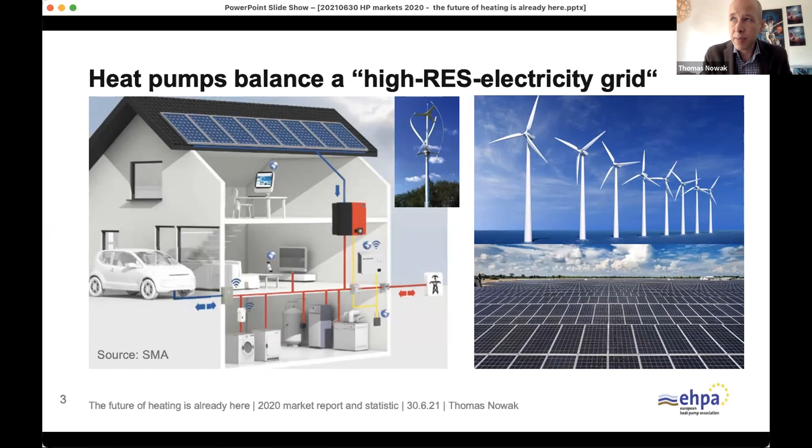On top of things, this slide shows that heat pumps also provide a balancing function to the electric grid, and that is something I find super important. If you've read the news, you've seen that last year Europe generated as much electricity from renewable sources as never before. So we're moving very fast into a direction where many small generators, and increasingly larger generators too, are providing volatile, not stable, electricity from green sources, and that needs to be balanced. Putting heat pumps into this concept, putting them into buildings, using these buildings as active nodes in an integrated energy grid that combines electricity, heat, and also cooling, is something very sensible because we want stable and sustainable energy supply.

Then there are also additional benefits from the technology. If you live in a city with a lot of air pollution, heat pumps will reduce that. I had this discussion this morning - I read that Canada is about to ban fossil cars by 2035, if I remember correctly. And if you consider that a diesel car is basically a fossil boiler, a mazout boiler on wheels, then maybe the heating system is the next topic that governments will address when it comes to air quality.

But also indoor air quality is getting increasing importance, especially as we see the effects of global warming. We're seeing that quite often it's getting very warm outside and you want to protect yourself inside with a better climate. So if you have a ventilation system, maybe an air conditioning system, and you put all this into perspective together, you say: I need heating, I need cooling, I need hot water, how can I do this in the most energy efficient way?

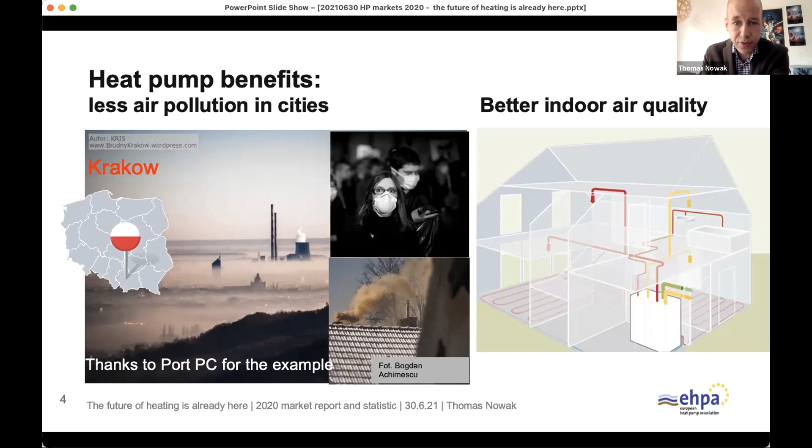Then a heat pump that provides heating and cooling at the same time is a good choice. And if you need cooling, always consider what you do with the waste heat. A cooling device where the waste heat is discharged into the environment will probably not be a good idea in the future, because we are producing thermal pollution from that perspective. And if the dual need for both energy sources is necessary, then we should have an integrated solution for that.

One word on the association: the EHPA is a sector organization. We represent more than just industry. We also have members from consultancies, research and development associations, companies and universities. We have utilities and national associations. So we're very broad when it comes to representing the heat pump industry as a whole, and we can answer quite a few questions you may have when it comes to a specific question applicable to a member state or to a certain technology.

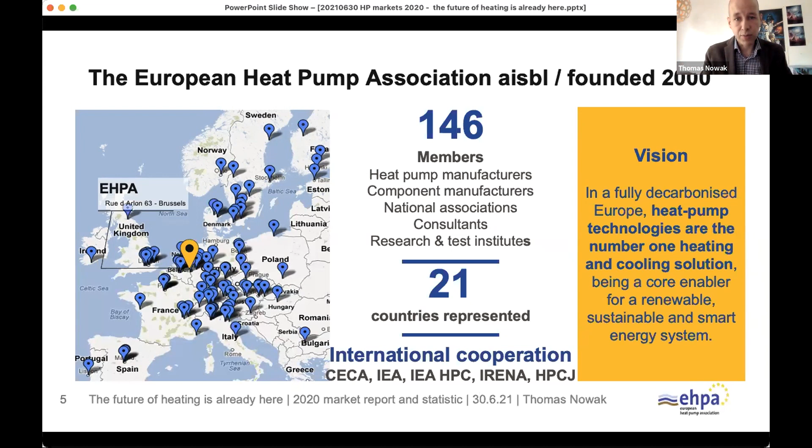We're looking, as I said, at all these different technologies - heat pumps as a whole. We are not looking at white goods, because in white goods heat pumps are typically just a component, and manufacturers don't see their focus as manufacturing the heat pump, but rather the bigger envelope - the fridge, the washing machine, the car.

What we want to talk to you about today is the European Heat Pump Market and Statistics Report. It's called 2021, but it has numbers for 2020. With this, we are consistent with many other bodies that provide statistics, so don't be confused - the numbers you'll find in this report and that we'll talk about today are from 2020.

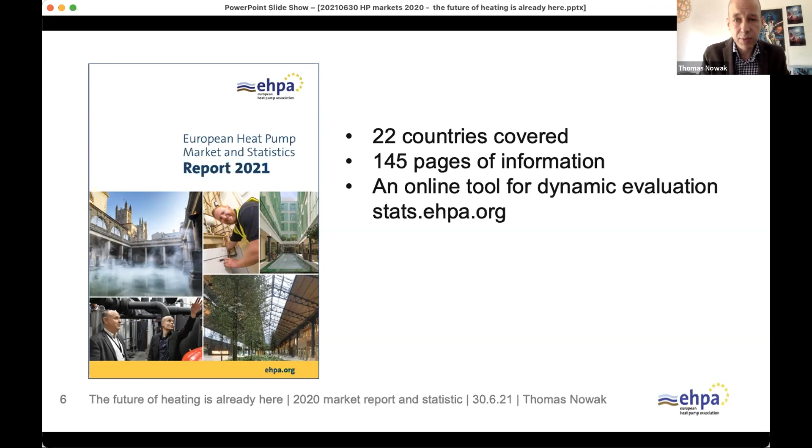We have 21 countries actually covered, not 22, and it's 145 pages of information. There's also an online tool for a dynamic evaluation, available at stats.ehpa.org. This report is available to all of our members. We also make it available on request for research and policy purposes. And for everybody else that wants to use the report and the data for commercial activities, we have it available for sale - you'll find the information there.

But now let's jump into the data. It's a huge amount of data - we are looking back to data that we started collecting in 1993. And of course, we have added country after country after country, and now we have quite comparable data for the last 10 years. This is all for these 21 countries that I talked about.

Here you can see that over the last 10 years, we saw a bit of a slow start in 2010, 11, 12, and 13. After that, it continued to grow, and the growth has actually accelerated over the past 5 years. Of course, everybody was affected by the corona pandemic, and the heat pump industry is no different, but at least there was no downturn - sales numbers have increased. If you look at the red arrow, you see that between 2015 and 2020, we were able to double the annual sales. This is very important, because we are still confronted with the fact that heat pumps are not a cheap solution as we speak, and we need economies of scale to bring costs down.

But economies of scale apply - I've seen different assessments on this, and there are numbers floating between 20 and 25% that economies of scale should bring down manufacturing cost. We expect, with the current growth, if that continues next year and the years after, we will have a doubling of the stock, which will then result in these savings by 2025-26, and maybe a second doubling by 2031. So all in all, we expect something like a 35 to 40% reduction of costs over the next 10, let's say 12 years.

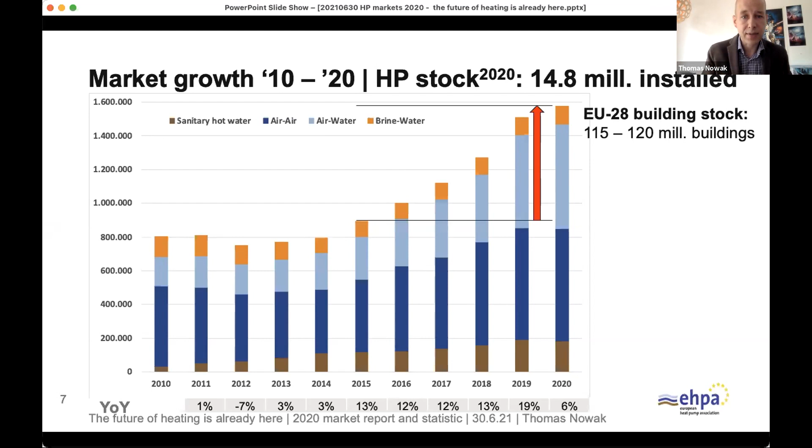I want to separate one category of heat pumps here: sanitary hot water heat pumps. They have been a driver for many installers, because if an installer is not so fit for purpose, or not so knowledgeable, not so trusting himself in the heat pump technology, putting a hot water heat pump next to an existing oil or gas boiler will bring about 15 to 20% energy savings immediately. It will make them acquainted, and also the end user, to a new technology.

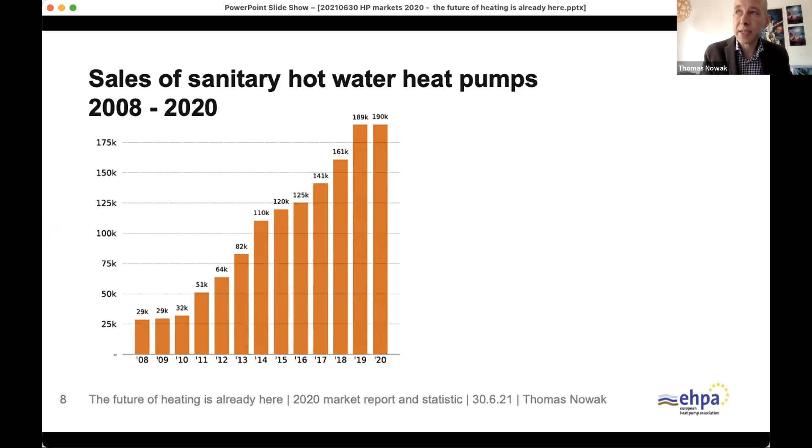So this was seen as a good inroad into the market, but we see that it's a bit stagnating and not growing as fast anymore as the other technologies. Maybe a guess could be that people are now more knowledgeable, and they're jumping directly from a fossil solution to a heat pump solution. We will see next year if this is a continued situation, or if it's just a result of COVID.

So the manufacturers know where they sell them. This is a European market, so it's also difficult to collect this data on a national level, because not every manufacturer is represented in all the heat pump associations.

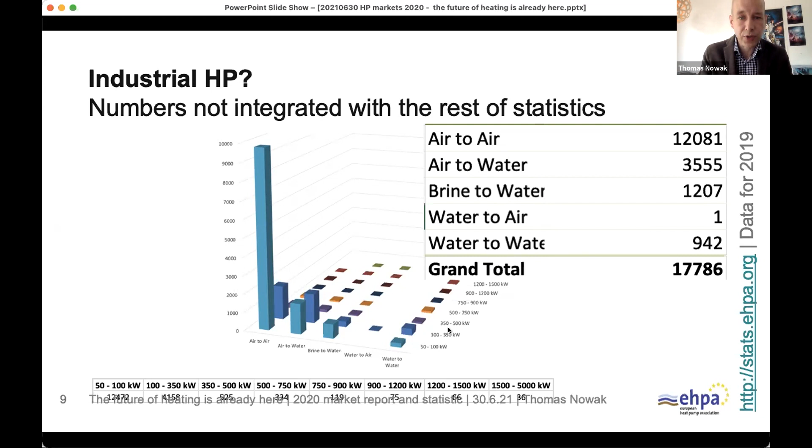We see that air-to-air is the dominant source, followed by air-to-water. Geothermal is relevant, mainly in the smaller part here between 100 and 350 kilowatts. So that's a topic where we need to increase our efforts, because our data coverage is not sufficient. Let's come back to the main slides again.

So the sales of heat pumps by type, I wanted to underline that air is now the dominant energy source. We are seeing more than 90% of all the heat pumps sold are using air as energy source. The geothermal and water-to-water units have a stable basis, but in an increasing market, so in absolute terms the numbers are about the same, but their share in overall sales is reducing.

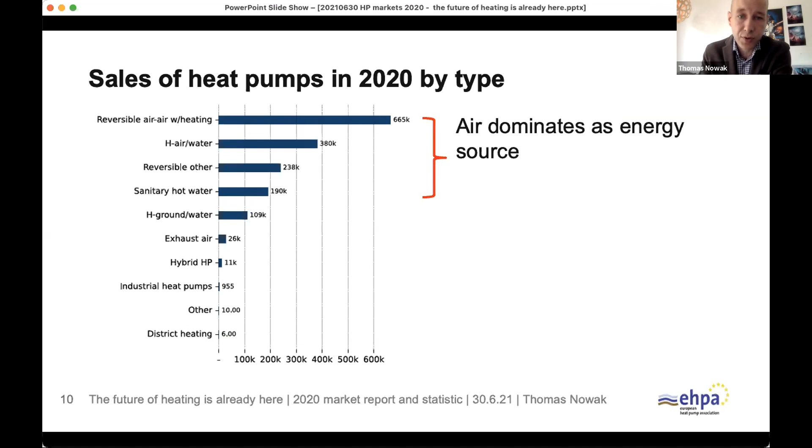You see also that we are trying to put hybrid heat pumps on the map. We don't have a lot of good data about that, and you're seeing the thermally driven heat pumps missing completely. That's because we were not able to bring enough contributors to the data collection to make it acceptable from a privacy perspective. And obviously we don't want to show how many units a single manufacturer is doing.

Then if we look at overall sales, who are the market leaders in Europe, you see that for a long time France is the undisputed market leader, has reached now 394,000 units, followed by Italy, and number 3 for the first time is Germany. Germany has seen a tremendous increase, 37% plus in 2020, which we think is a result of both the introduction of a CO2 price and a very substantial subsidy scheme targeted at renovating buildings.

If you replace a fossil boiler, an oil boiler, with a heat pump, you receive subsidies of 45%. If you replace a gas boiler, you still receive 35%. So people are attracted by this type of subsidy, and it's triggering demand, as you can see. The top 3 markets here were responsible for nearly 50% of all sales, and the top 10 markets are responsible for 87% of market sales.

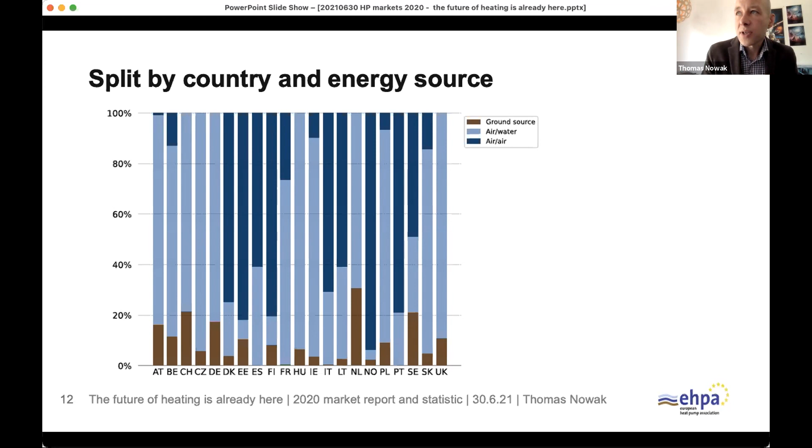And then you see the dark blue bars—these are hydronic systems, air to water, and this is a tradition. It's a simple tradition: if in your country heating is done by hydronic distribution, then this is the prevailing solution. If air is the main distribution medium, then it's an air-to-air unit. I'm sorry, I think I mixed this up—air to water is light blue and air to air is dark blue. We have to change that. That was different in the past.

Then if I look at the split by country and size, we also see that the majority of all heat pumps—dark blue, light blue, and green—are below 20 kilowatts, and in most countries this is the majority of the market. The larger ones are just coming now, but there may also be a bit of lack of precision here, because many of these larger heat pumps, if deployed in commercial buildings, are often deployed as air conditioning units and not as heat pumps. So we have a naming problem that makes collecting statistics a bit more difficult, especially for these multivalent units that provide heating and cooling at the same time.

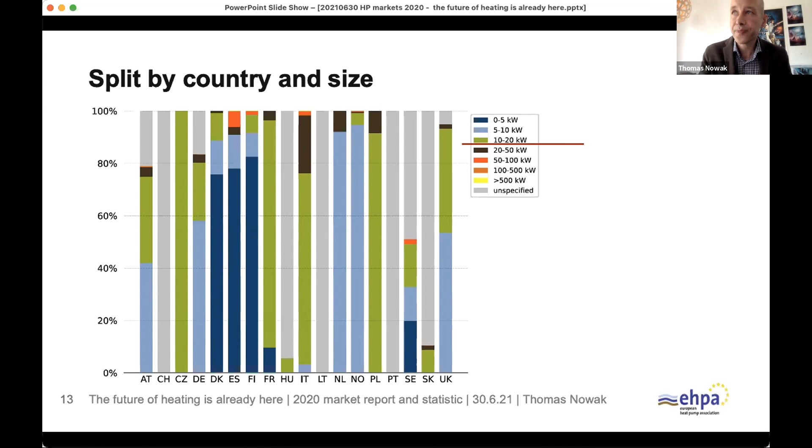If we look at the overall benefits, I mentioned them already conceptually. We show that 14.8 million heat pumps provide about 120 gigawatts of capacity, and 250 terawatt hours of useful energy. Mind you, we're talking about a demand for heat of 2,500 terawatt hours, so we're providing about 10% of useful energy. 159 terawatt hours of this is renewable, and 203 terawatt hours is savings when it comes to final energy use—this is a different calculation method I could explain in detail.

And then there's CO2 savings of 40.6 megatons. And most importantly now, for demand side flexibility, a potential of 3.4 terawatt hours.

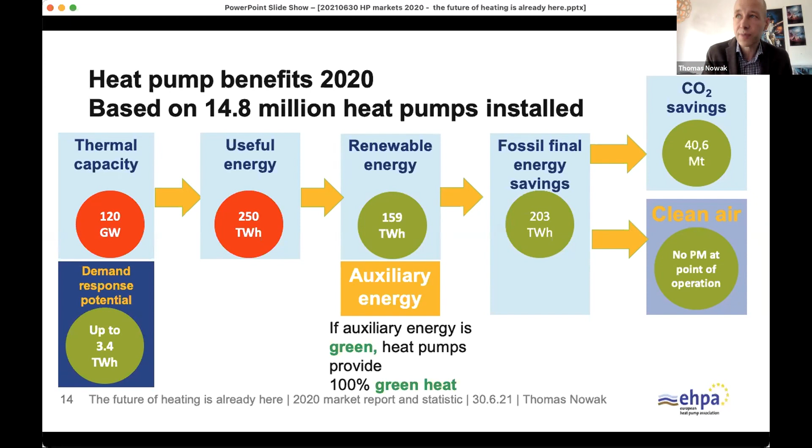The heat pumps are manufactured across Europe. We have recently counted again 165 manufacturing sites. It's mainly SME based, often located in rural areas. That means this technology provides perspective, employment, and tax income also to municipalities that are at the end of the highway—it's often quite difficult to visit heat pump manufacturers because they're typically not central.

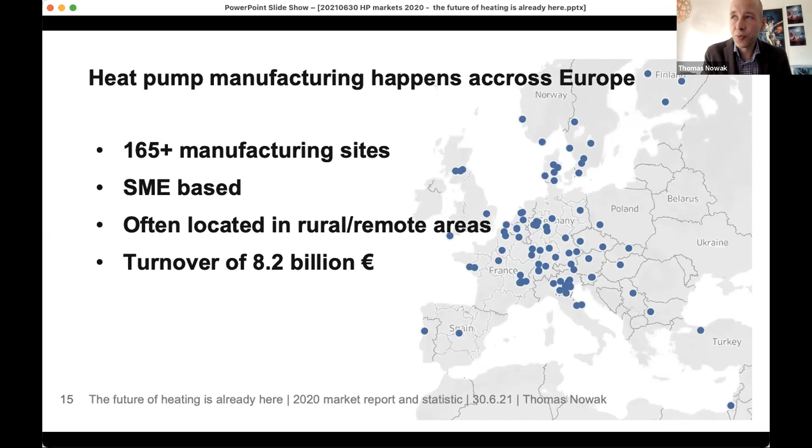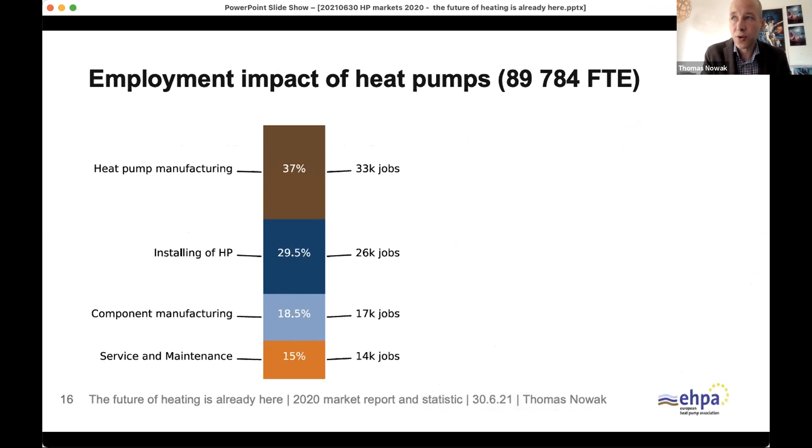The industry generates a turnover of 8.2 billion euros and also provides employment—nearly 90,000 full-time equivalents are necessary to manufacture, install, and maintain the heat pumps and their components.

Then the market share, where do we stand? When we look at overall heater sales, you see that this is also a bit fluctuating, but we are seeing heater sales around 7 million units and 1.4 million. This is heating heat pumps, so we have excluded the hot water heat pumps. Of these are heat pumps, and that gives us a market share of around 20% in annual sales, and that has been increasing.

So again, also here you can see that there's an increasing difference between fossil boiler sales and heat pumps, and we hope that this gap increases even further in the future. If it continues like this, maybe we will have a heat pump share of 50% in annual sales by 2035 or earlier.

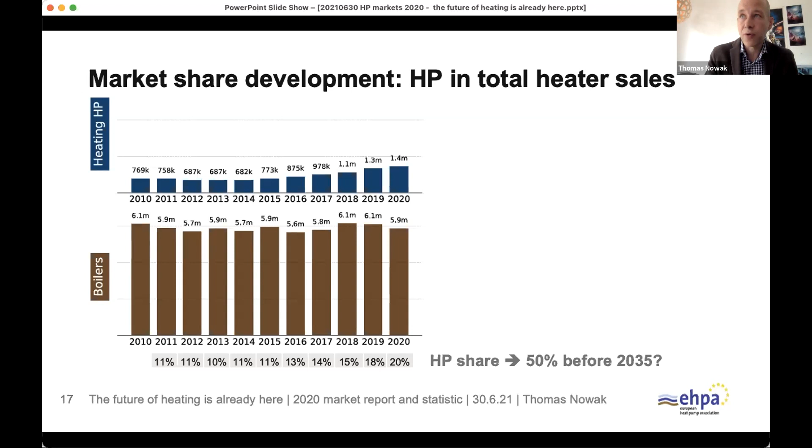Where is the potential? Is that even realistic, you may ask? If we compare heat pumps sold per 1,000 households, the biggest countries are the smaller countries by population, but nonetheless they have huge penetration: Norway, Finland, Estonia, Denmark, Sweden, and Lithuania. So you could say the top 5 are countries in difficult climate zones. My message here is, if heat pumps work there, they can work everywhere. That gives us huge potential for additional growth in the future.

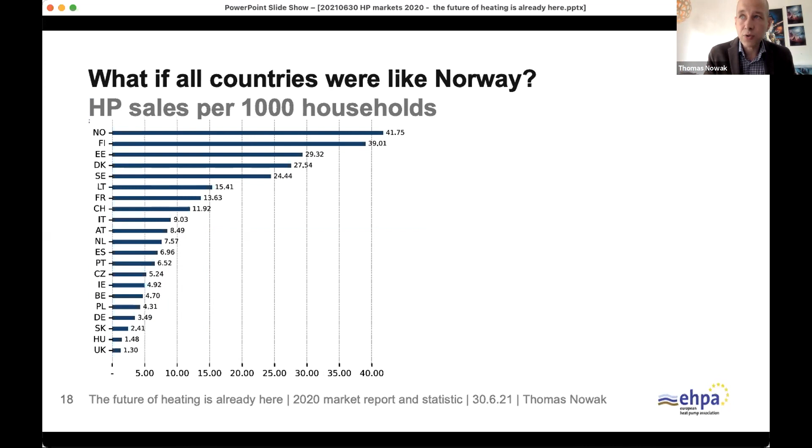Of course, there are some other guiding functions. And is that necessary? Yes, it is. I will just show one slide that Jozefien will pick up on later. This is the EU Energy Systems Integration Strategy that is very optimistic and expects a lot from the heat pump industry to deliver when it comes to reaching Europe's energy and climate targets.

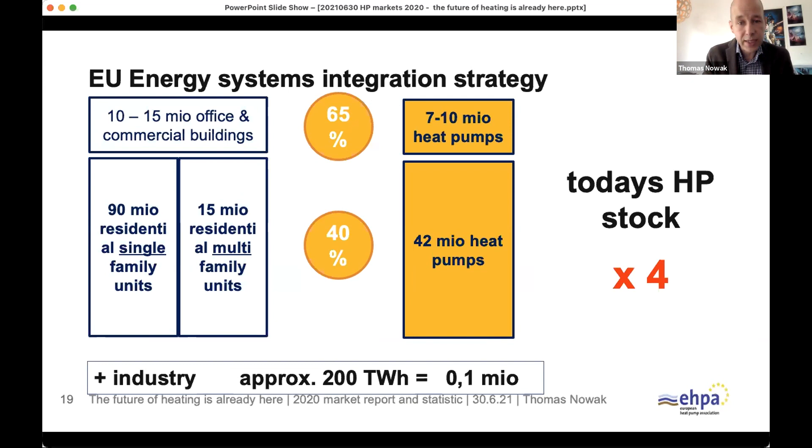In short, 40% of all residential buildings and 65% of all commercial buildings are supposed to be heated efficiently with electric heat pumps in 2030. We're not discussing industry yet, but that means, based on today's stock, a factor of 4.

Here I have just drawn with my own hands a nice S-curve, and you can see that we are at the bottom, at the tipping point of an S-curve. So expect the heat pump markets to grow fast.

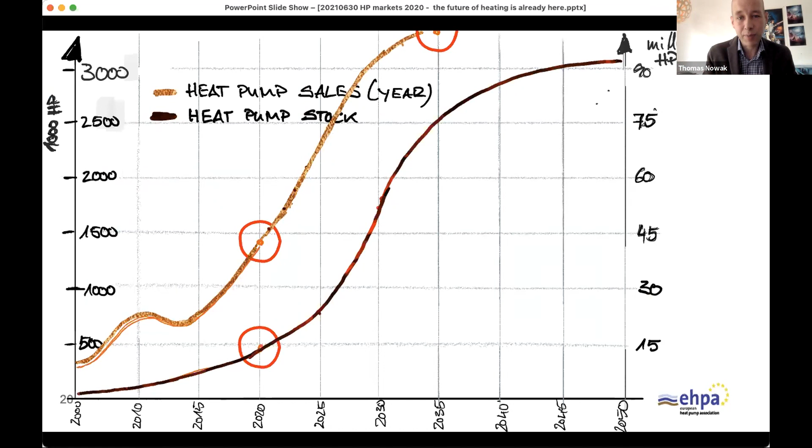But of course, we have a number of requirements, and I would say the heat pump industry can deliver, but do we have the value chain ready? I think Niels will come in on that point. So I want to say we are aware of that. Is the technology advanced enough? Are heat pumps easy to install so that installers like to install them? Do we have enough planners? And maybe having the planners is even more important than having the installers.

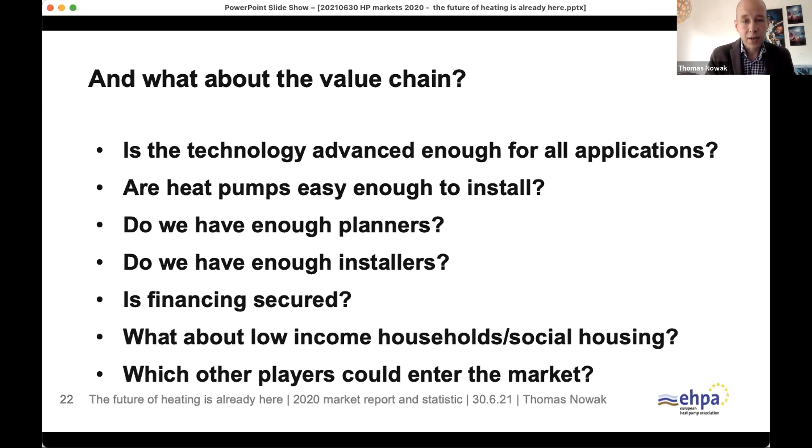So that would conclude my introduction of the market, and I would like to hand over to Jozefien, who will talk to us about the market framework and legislation. My question here: we can deliver from a technology perspective, but do we have the right framework to trigger sufficient demand to justify an increase of production? Thank you very much so far. Jozefien, I hand over to you.

Thank you. One second, please. I'm sorry, Thomas, can you please check the chat box? I will go into the chat box, but since I wasn't too conscious of time, let me just answer these things by writing while Jozefien presents. Okay, thank you.

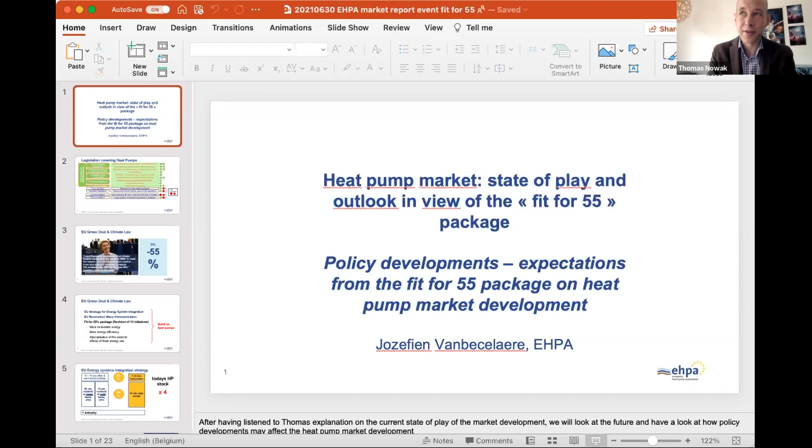Can you see my screen? Yes, but it's not in presentation mode yet, it's still in preparation mode. Okay. Still not? No? Okay, strange. On my screen it's presentation mode. Wait. Okay, and you're sharing your speaker notes with us while the presentation mode is on your other screen, maybe. Okay, I will re-share. Now? Yes, go ahead. Yes? Okay, okay, yes, okay.

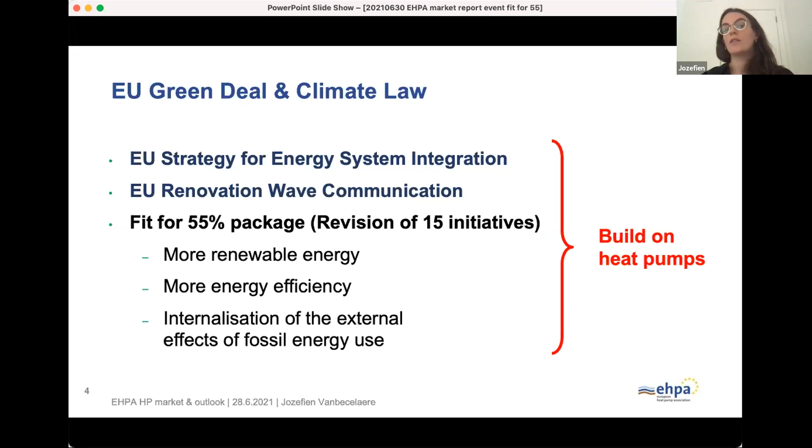So if we look into this Green Deal and climate law, it's not only this Fit for 55 package that is coming up, but there has already been some publications and communications. First of all, this EU strategy for energy system integration, which Thomas also highlighted. And we also had the renovation wave communication. And in all of these, heat pumps are a very important aspect.

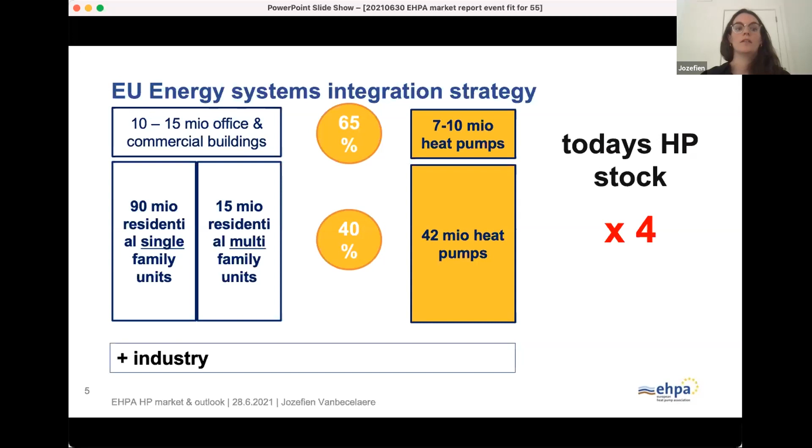So again, the slide that Thomas has highlighted before, in the energy system integration strategy, we see that there's very clear targets. So the target is to have 65% of all commercial buildings heated electrically by 2030 and 40% of all residential buildings heated electrically by 2030. And if we think about heating electrically, we need to apply the energy efficiency first principle. This is key throughout all energy legislation. So then it's very logical that this is mostly done with heat pumps. And if we look at the current amount of buildings, the current amount of heat pumps, then this would end up in a quadrupling of the current heat pump stock by 2030, meaning 49 to 52 million heat pumps by 2030.

If we look then at the renovation wave communication, there also heat pumps and decarbonizing heating and cooling is a very important aspect. And as a target, this communication puts that it wants to renovate the 35 million least performing buildings by 2030. And this is very important for our sector because this means actually that all these buildings will be immediate heat pump candidates. So this is also a very important target.

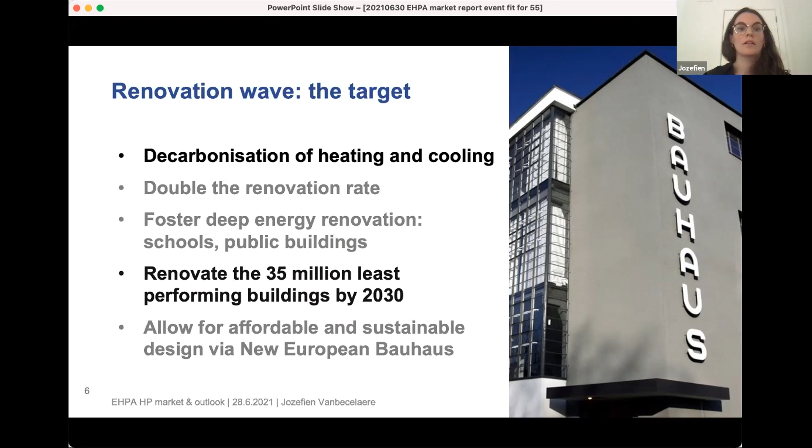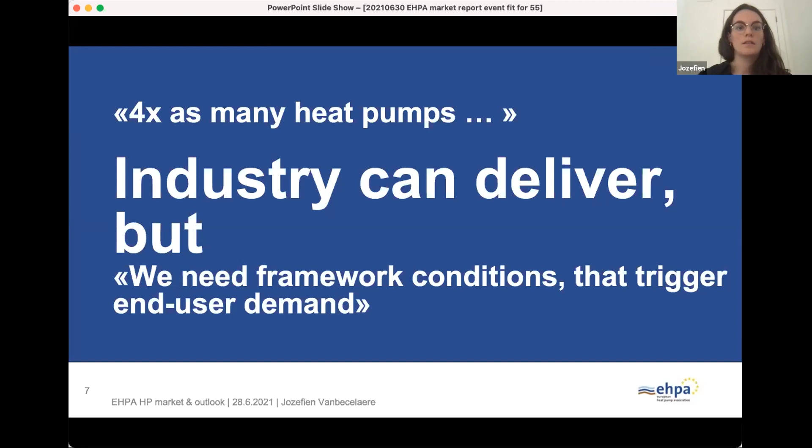So as said also before, this quadrupling of heat pumps, we know from our members, the industry can deliver. We will also hear it from the next speaker today. So the industry is ready for this, but we really need the right framework conditions that trigger the end user demand. So it's not enough to just produce more and to have these heat pumps in your stock. You also need to install them and there needs to be demand. This demand triggering, we really see or hope, and it should be the role of the Fit for 55 package to trigger this end use demand for heat pumps.

In our recommendations, we have grouped them into four groups. The two first are more on regulation. So the first one is on aligning policies. A second one on really unlocking the full potential. A third group of recommendations is really on supporting citizens. And then a fourth group is on pricing.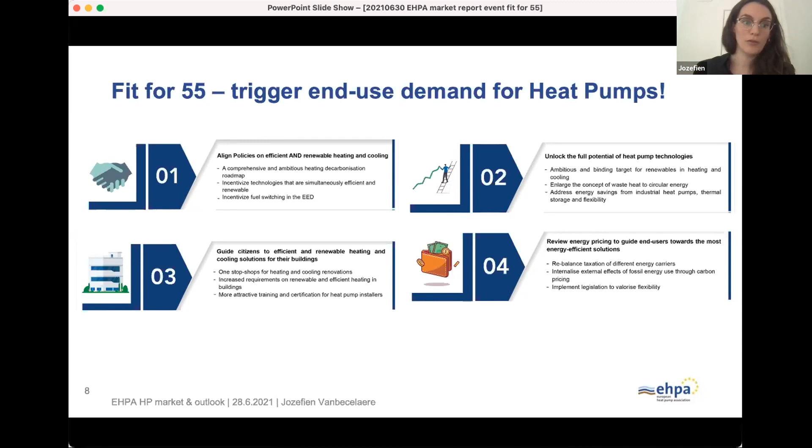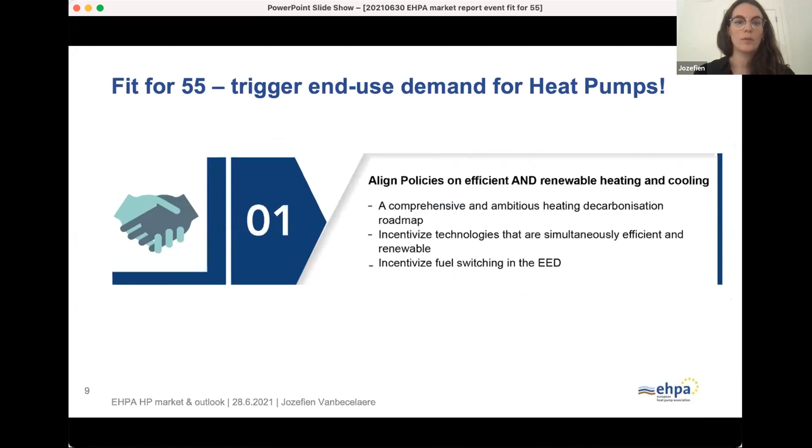So if we look at the first group of recommendations, it's about aligning policies on efficient and renewable heating and cooling. And what do we mean by that? Well, currently we see that heating and cooling policy is really scattered. So you have the comprehensive assessments on heating and cooling in the Energy Efficiency Directive, the renewable assessments on heating and cooling in the Renewable Energy Directive, then the long-term renovation strategies, the NECPs. So these are all requirements for member states that are scattered throughout different legislations. And these are not aligned. First of all, they are not aligned on timing.

We see that the assessments need to be done by December 2020, and then the strategies already had to be done by April 2020, or the plans by December 2019. So we really need to be consistent in assessing before planning. And for member states, it needs to be clear what should be done by when and how this is all linked to each other.

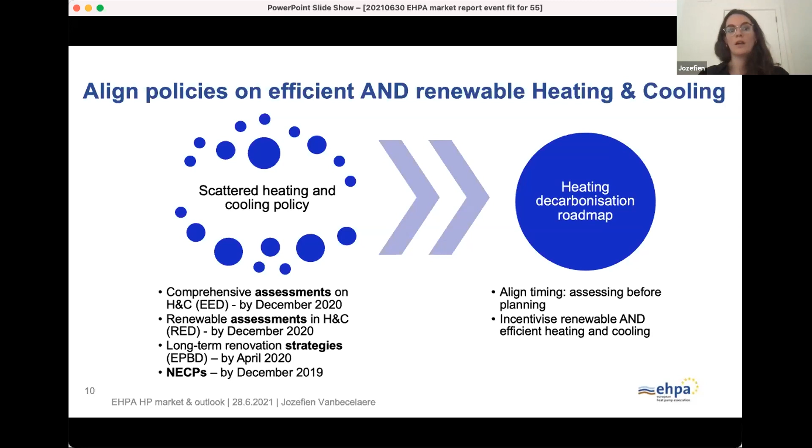We really think that a heating decarbonization roadmap, putting this all into perspective and clearly linking everything, is necessary. Because if it's not clear for a member state, how can it be clear for a citizen what they should do and by when? Also linked to that, in some legislations only the renewable aspect is considered, in others only the efficiency aspect. But we know a heat pump is beneficial to both energy efficiency and renewable energy targets, so technologies that contribute to multiple targets should be incentivized more and this should be highlighted.

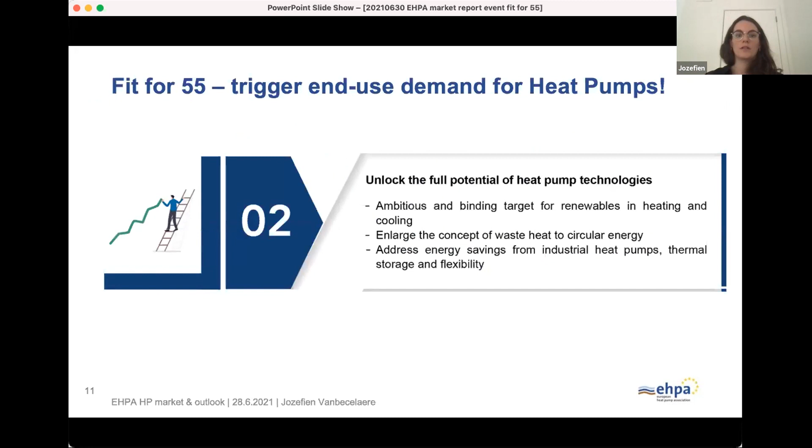If we look at the second group of recommendations, this is about unlocking the full potential of heat pump technologies. A first concrete ask is that we really need a binding renewables in heating and cooling target.

If we look at the past, in the first Renewable Energy Directive - this graph is from the shares statistics from the Commission - the green bullets with the white line represent renewables in heating and cooling shares. At the time of the first Renewable Energy Directive in 2009, you had about 15.31% share of renewables in heating and cooling. At the time of the second Renewable Energy Directive in 2017, this was about 19.49%. So between those two, there was only an increase of 4.2 percentage points. Especially when you know that the second one has this indicative target of an annual increase of 1.3%, we see that this is not being followed and is not enough, because it has been consistently below 1 percentage point per year.

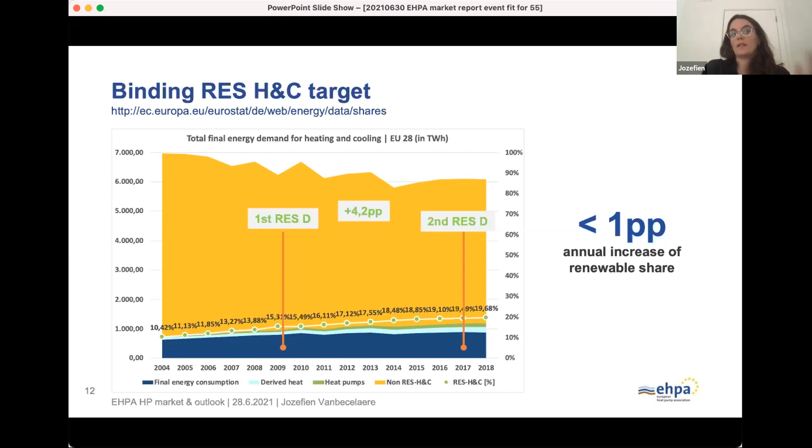So we really need a binding target to push member states to go for this, because an indicative target - we see the result - it is not being followed.

A second recommendation, already highlighted a bit by Thomas, is that we should incentivize circular energy use. What do we mean by that? A heat pump has the unique feature that it can implement the energy efficiency first principle by recovering or reusing waste heat. When you recover waste heat, this waste heat is no longer waste, but is used again in a circular way. So a heat pump really is a tool that implements the circular energy principle.

Currently, waste heat recovery can only be counted towards the renewable heating and cooling targets when it is unavoidable and when it is captured by a district heating and cooling system. But this word 'unavoidable' is not really defined - what is unavoidable? We think this can be incentivized more strongly by really requesting that every time there is waste heat, it's looked at whether this can be reused on site or nearby to heat other processes or buildings.

In this map here, you see excess heat activities in industry sectors all over Europe. You see that there is a huge untapped market potential for industrial waste heat recovery. But that's not only the case in industry - we also see that even in the commercial and residential sector, there is a huge untapped potential.

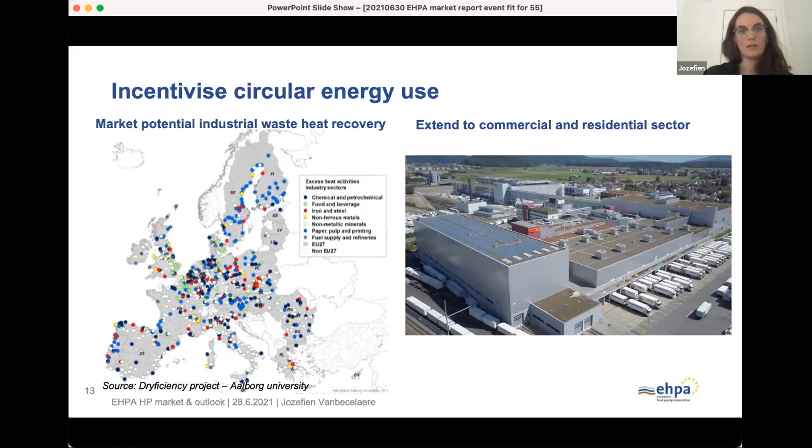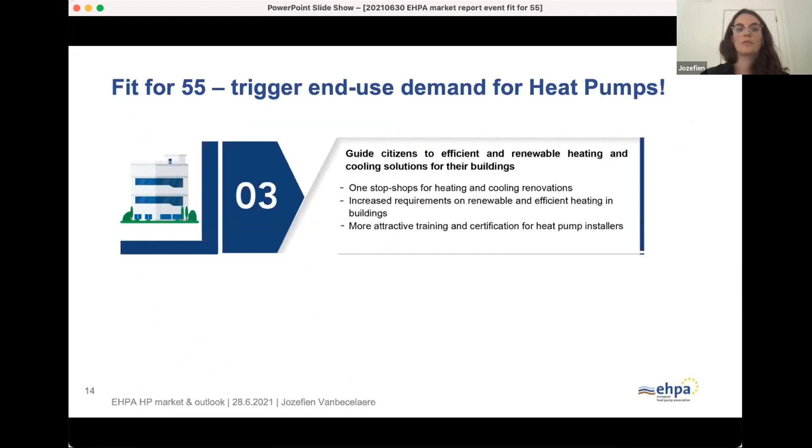Our third group of measures is really to guide citizens very concretely to efficient and renewable heating and cooling solutions for their buildings. A measure there is the implementation of one-stop shops. I think by now this is shared among many stakeholders as a bit of a no-brainer - that one-stop shops really work well and should be implemented widely.

Another concrete measure is the minimum share of renewable energy in buildings, where we propose to have at least a minimum share of renewable heat as part of this share. So now the discussion is mainly around implementing this minimum share of renewable energy.

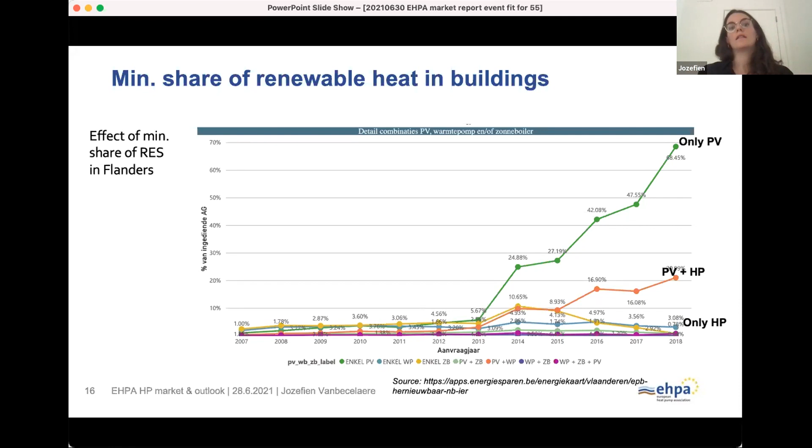Therefore, we really propose to look at this minimum share of renewable energy in both power and heating, so people are triggered to look at both aspects.

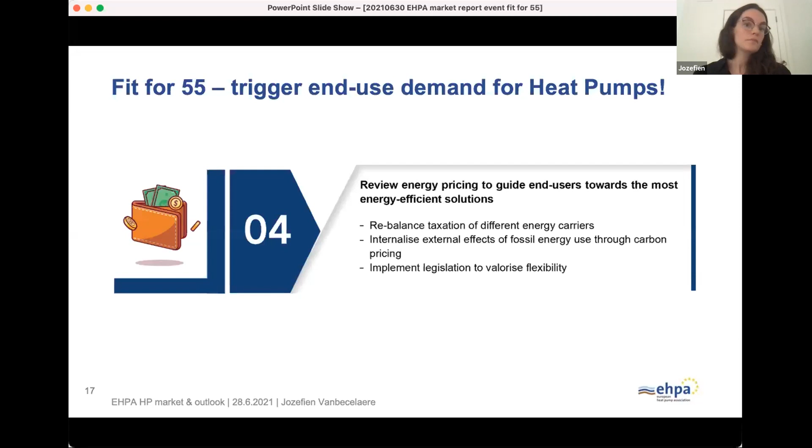And then the last part of the recommendations is on pricing. Pricing really needs to be reviewed to guide end users towards the most energy efficient and renewable solutions.

As also mentioned already by Thomas, heat pump technologies are today the best in class on energy efficiency, on renewables, on air quality, but also on this very important demand response potential. But on costs, they are still more expensive than fossil boiler technologies. And to reverse this, or at least to rebalance this, carbon pricing is needed to make the best technology also the most affordable one.

And of course, here we cannot forget that we cannot put the burden on the poorer households. We really need to use these revenues from carbon pricing to support these households, for example, through one-stop shops, through subsidies and so on.

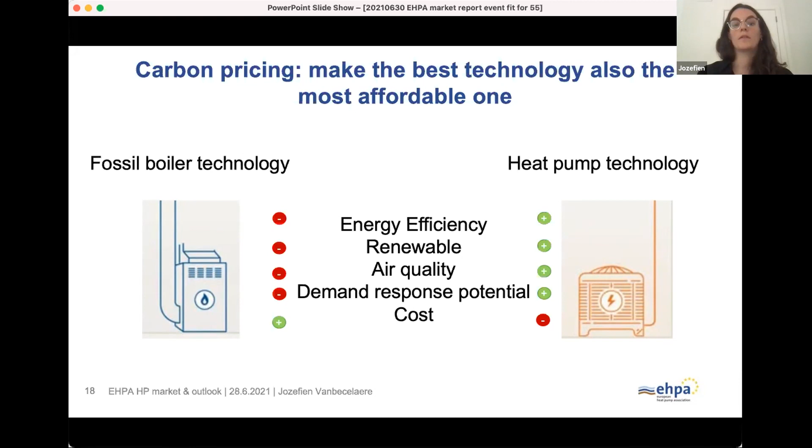An area where this pricing problem is again very clear is taxation. We see here that the levies and taxes placed on gas, shown in red, are in all countries except the Netherlands much lower than the taxes and levies placed on electricity. So the burden of the energy transition is almost entirely put on electricity consumers, which is contradictory because electricity is getting greener by the day. This should really be tackled by adapting the energy taxation directive.

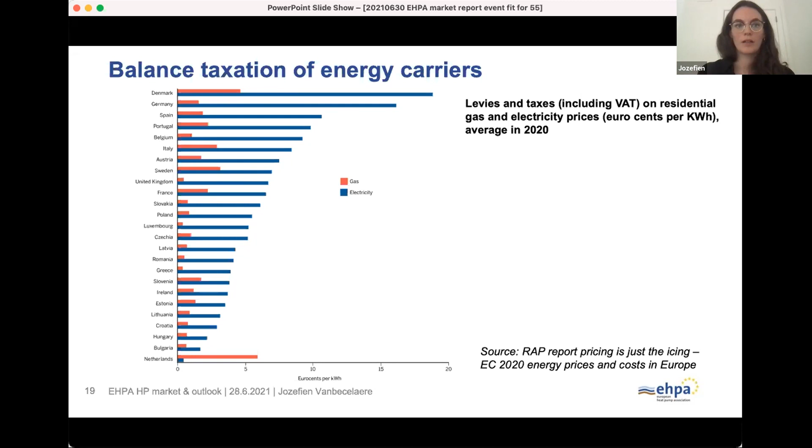If we look now at the way forward, we have this adjustment of production where we know the industry is ready, where we can quadruple by 2030. But we really need to activate this end user demand, where we see the Fit for 55 package as a huge opportunity to do this by using regulation, support, and pricing. And then in the end, we will have the decarbonized building stock.

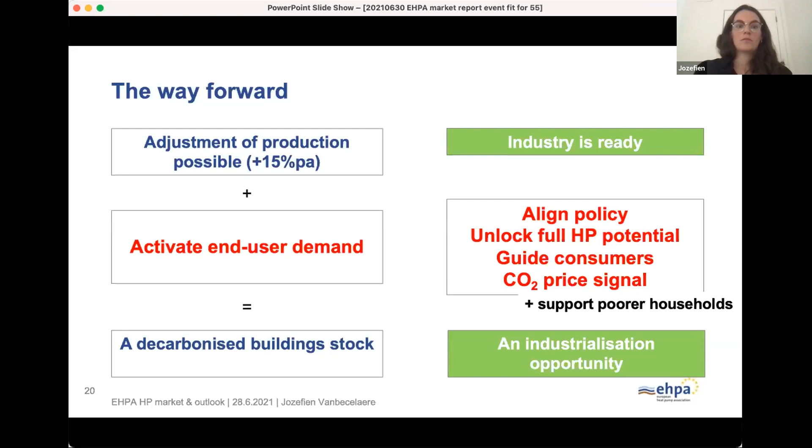This is again an industrialization opportunity for many sectors, but for sure also for the heat pump sector. These 165 manufacturing sites in Europe will then stay in Europe and can even grow. More jobs will be created and so on. So this is really an industrialization opportunity for the sector.

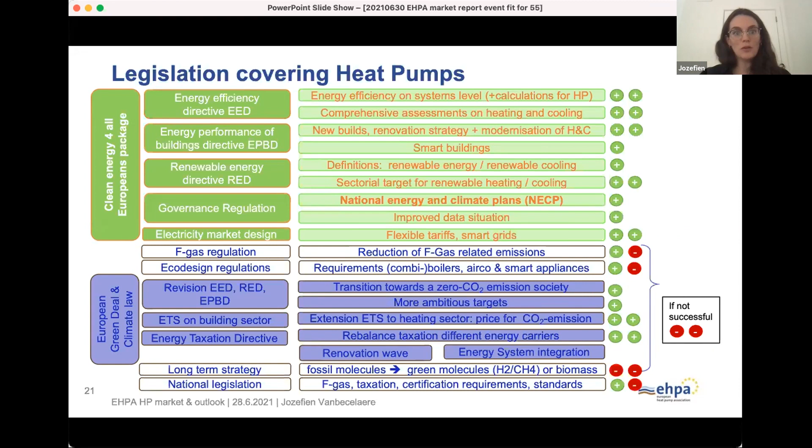Here it's to complete the picture from the beginning with the upcoming legislations from the Fit for 55 package. I've put the pluses already on the right, but of course we do not know the details yet, so let's hope they are ambitious, so that we can reach the targets of quadrupling heat pumps by 2030. And if this is the case, we really have a heat pump decade ahead of us, and we can reach this quadrupling and continue this growth.

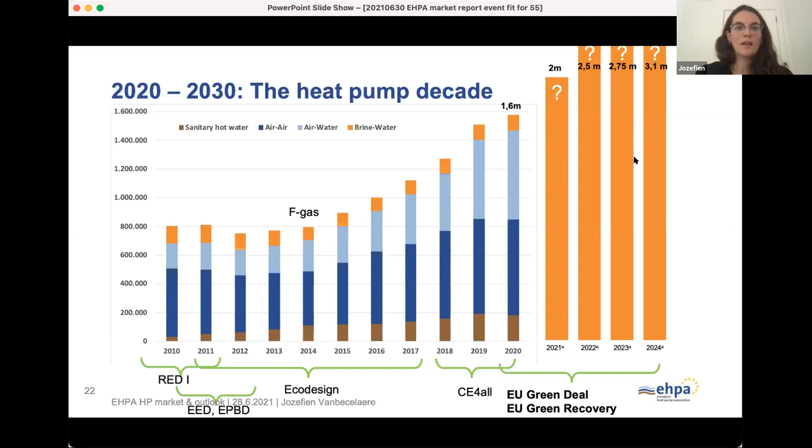One last criticism that we often get is that if there are so many heat pumps added, if there's 50 million heat pumps in 2030, the lights will not stay on because the electricity grid cannot cope with this. Well, this is not true. We have gathered quite a large number of utilities and system operators that really say that the grid is ready for this and can support this. They have all drafted a statement together that will be launched on Monday, also in a seminar similar to this one. We invite you all to attend that seminar, because that's a very important aspect that cannot be overlooked. Thank you all.

Voilà. Super, thank you very much, Jozefien. That was a tour de force.

It's really a very complex matter, and I hope you can take home that heat pumps are a highly regulated technology. I want to stress again what Jozefien said last, this idea that the electric grids will falter if more heat pumps are deployed. We see it now that it's exactly the opposite. The electric grids will benefit from having more heat pumps, and of course heat pumps will benefit from more stable electric grids.

We also see that electric transport is probably more interesting and more attractive than heating. You would rather show your neighbors your new car than your new heat pump. Unfortunately, I really have to say, but that's the situation. And so the stress on the grids from electric mobility is probably higher, and here the heat pumps can help.

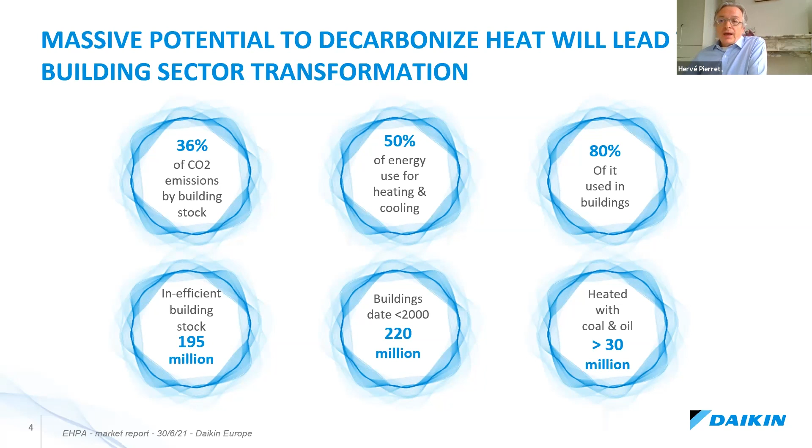Heat pumps, for us, can decarbonize in three ways. First of all, the renewable energy factor: heat pumps are clearly taking energy from renewable sources and translating that into different heat pump types. Obviously there are air-to-air heat pumps, which were already addressed in the statistics by Thomas. And then, importantly, there are a number of hydronic-based heat pumps, air-to-water, ground-to-water, or hybrid heat pumps, which are perfectly fit to meet the requirements in most European houses and buildings, because we know that the vast majority use water-based heating systems. So we believe that hydronic heat pumps can and will play a key role in that.

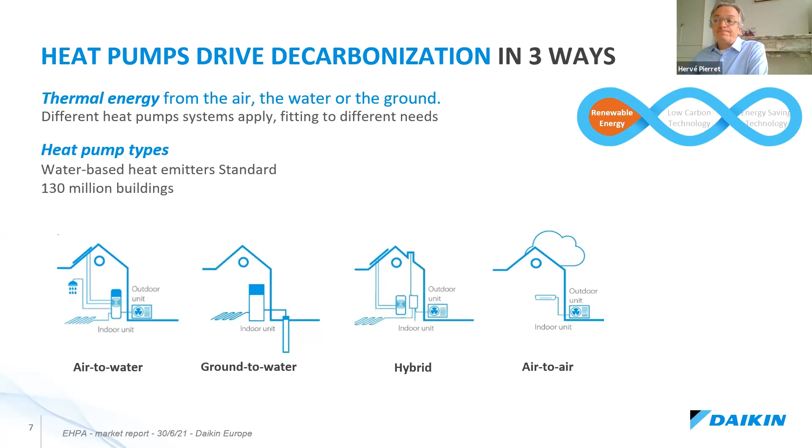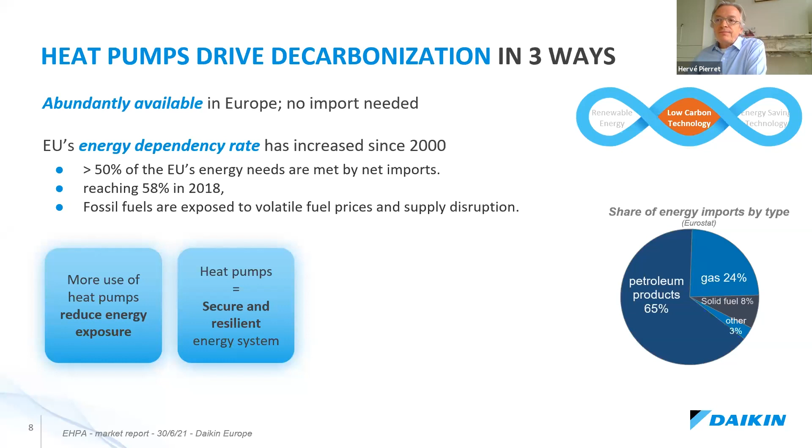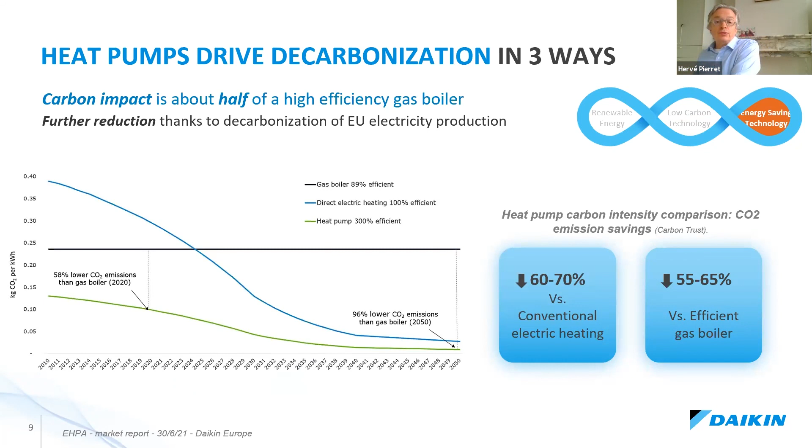Heat pumps are a low carbon technology, thanks to the renewable aspect of the energy, which is abundantly available in Europe. A key element is that today the EU's energy dependency rate has been gradually increasing since 2000, so using heat pumps is a way to change that, since renewable energy doesn't need to be imported. This gets us away from the standard approach we've known so far. A third element is that the heat pump is an energy saving technology, because the carbon impact of a heat pump is about half that of a high efficiency gas boiler.

That means it is proven that the heat pump can contribute to decarbonizing the heating sector. How do heat pumps do that? By now we can surely say that heat pumps are a proven solution from small residential over large commercial into industrial applications. As Thomas already said, heat pumps have very high penetration in the Nordic countries, and indeed that's what we see - heat pumps are applicable everywhere from north to south, east to west, with operation ranges down to -28 degrees.

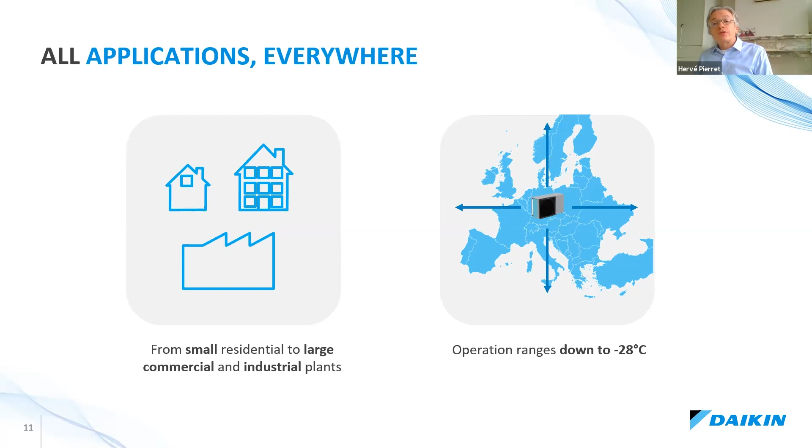If we look closer into the residential sector, we see applications in single family houses, where we believe that by 2030 heat pumps will become the standard heating application. We see already today in the Netherlands, for instance, that in a couple of years the new build sector has moved to heat pumps entirely.

An important opportunity are multifamily houses. There we have two types of approaches: decentralized heating apartment buildings, where people put an individual heat pump per apartment - potentially by 2030 we could see 1 out of 5 new built apartment buildings having such heat pumps, maybe higher depending on the offers our industry develops. But also important is the segment of apartment buildings using centralized heating, where we see an opportunity for different types of heat pumps, potentially in combination with district heating, playing a key role. So next to individual houses, apartment buildings will also be more apt to use heat pumps.

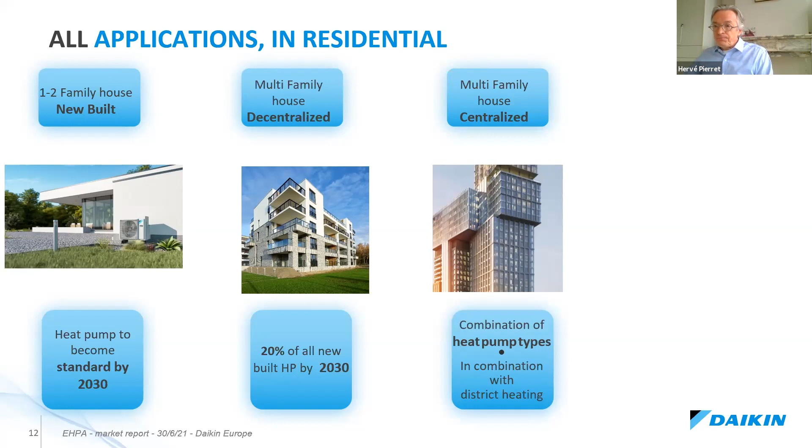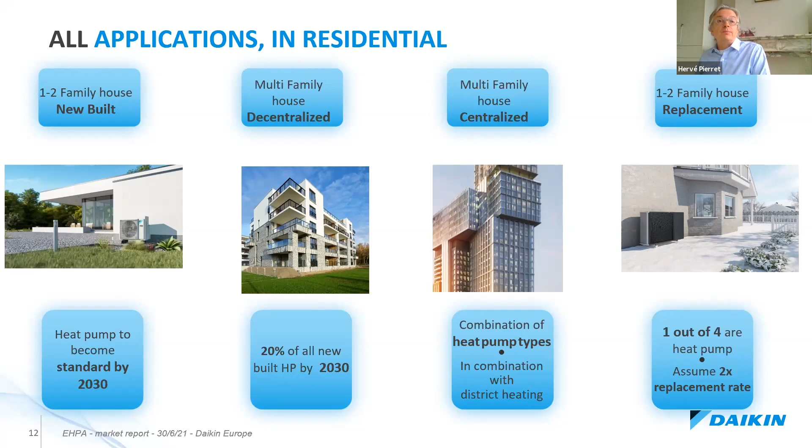Then potentially the largest challenge to turn into an opportunity is the replacement segment, where we are looking at massive standard fossil fuel heating systems to be potentially turned into renewable heating. As mentioned before, the objective to double the replacement rate will be a driver to move to more efficient heating, where we could potentially see 1 out of 4 heating systems being a heat pump by 2030.

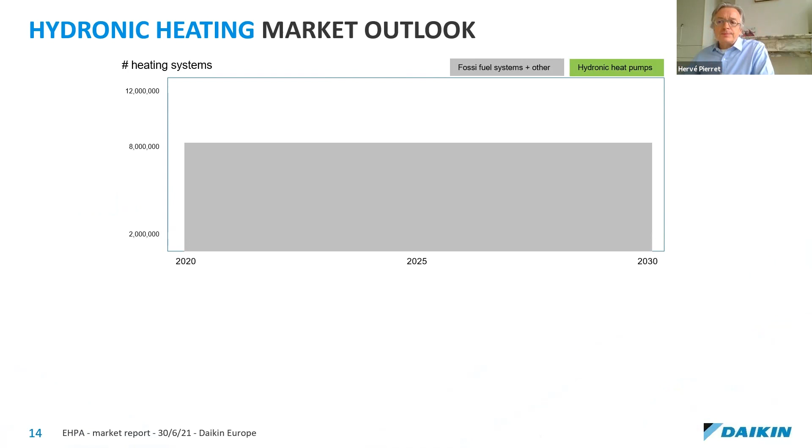To put that into practice, I'd like to show you a simulation model we've made, taking the current situation of about 7 to 8 million heating systems sold per year in Europe. What's key in this heating market is that in the new build market, although we might expect a small reduction in new build housing intensity, heat pumps as such will become standard by 2030.

The remaining part of heating systems goes to the replacement market. If we apply the assumption of a doubling of the replacement rate, it will actually result in an increase of the total heating market, because more people will replace their old inefficient system with a more efficient one. This could mean that in some countries where coal heating is still common, or people have non-condensing boilers, a part will move probably to condensing boilers, improving some energy efficiency but not entirely. But obviously the share of heat pumps will grow significantly - double, triple, potentially.

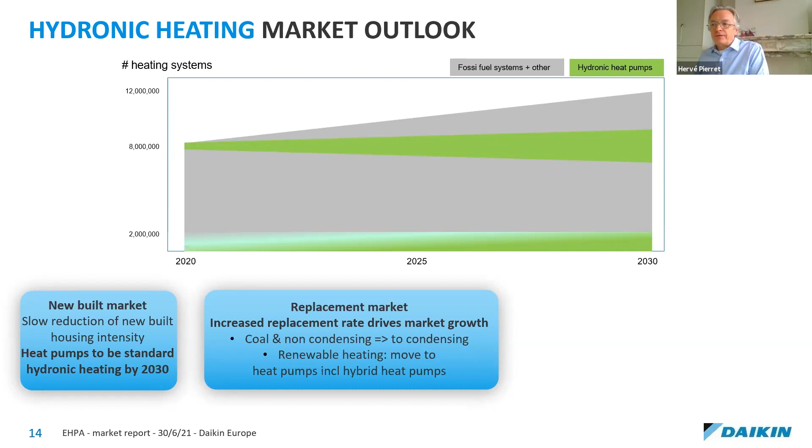The question we need to ask ourselves in this simulation is: with this view, do we as an industry meet the EU decarbonization targets? Can the rest - the gray area you see - be gas boilers that include a 20% blending mix with hydrogen? Will there be 100% hydrogen-ready boilers, and by when will they be applicable or widely installed? And moreover, what can we do with heat pumps to increase that share?

Will it be full electric heat pumps, or will a significant part be hybrid heat pumps finding their way in the market? That's a question we are still asking ourselves, and that we are gradually, as Daikin or as an industry, trying to find the right response to. But surely what we see here is a tremendous positive outlook for the heating sector, and especially the heat pump sector.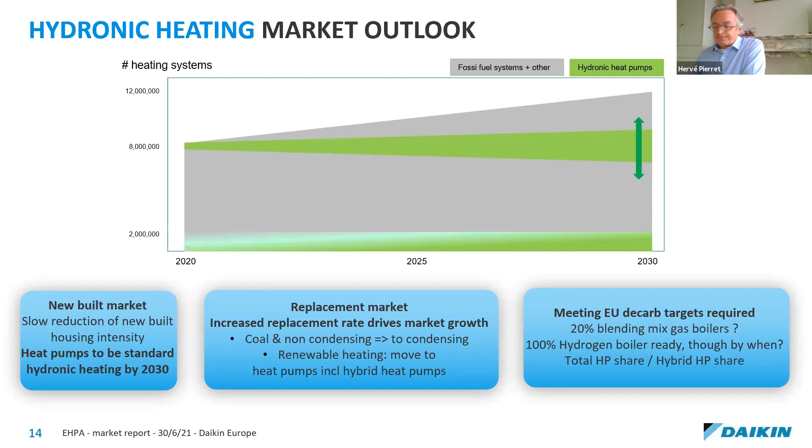What are we doing as an industry? I believe it's important to know that the European hydronic heat pump sector not only has a firm base in Europe, but when you look at it worldwide, we are developing heat pumps with the highest standards. We see increasing questions and demands from overseas to look at our heat pumps and potentially implement them there. It's clear there's potential for heat pumps to boost economic growth, increase employment, create jobs, and generate a positive contribution to the economy.

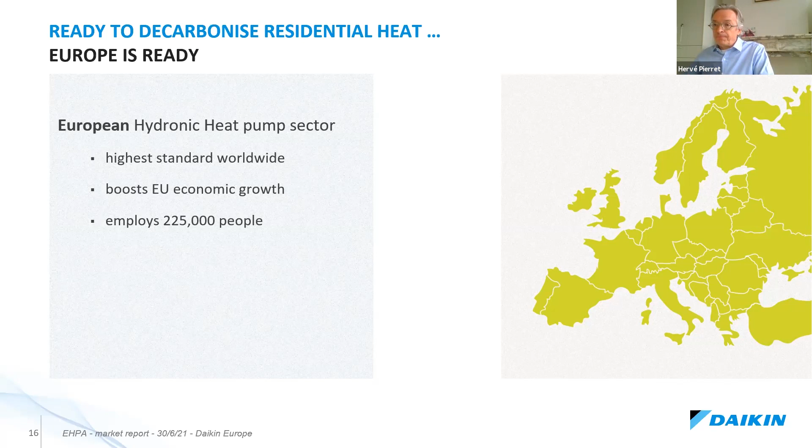Specifically at Daikin, what we are doing is really focusing on development of the right heat pumps for Europe. That's why we've decided to invest in a new development center here in Belgium, employing over 220 people, where we look into detail on how to develop the right heat pump for the right markets, taking into account the different climate zones in Europe, different customer and user expectations, whether design, sound concerns, etc. Also very important is taking into consideration the expectations of our installers.

Over the years, if we look back at the heat pumps we sold 10 years ago versus today, they've gone through massive change by taking into account elements that make installation easier for the installer, where it's now common to have remote commissioning of heat pumps. On the other hand, we're also looking at not only remotely monitoring heat pumps, but to a certain extent remotely repairing them, to help and support the installer and make his life easier and more enjoyable in installing and maintaining heat pumps.

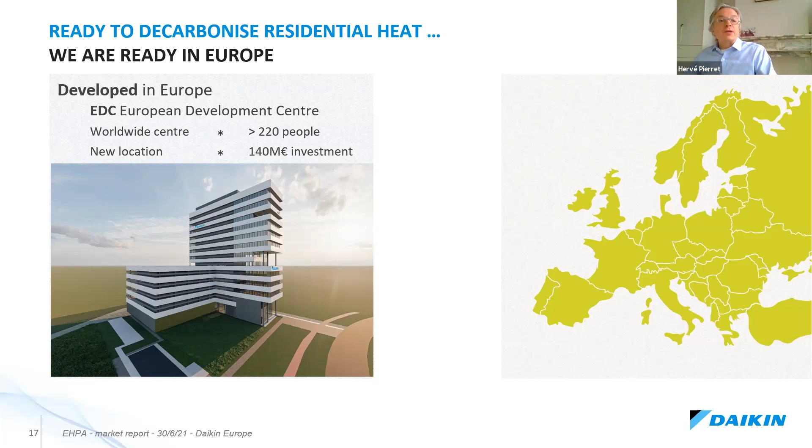That's the aspect of development. Secondly, on the production side, in Europe we've been present for over 45 years, almost 50 years. Among all our heat pump factories in Europe, we today have 5 factories dedicated to heat pump production. Most recently, in our factory in Germany, we've increased some production lines to meet increasing demand, and we continuously reevaluate our production capacity in view of the increasing demand and the simulation I showed you earlier.

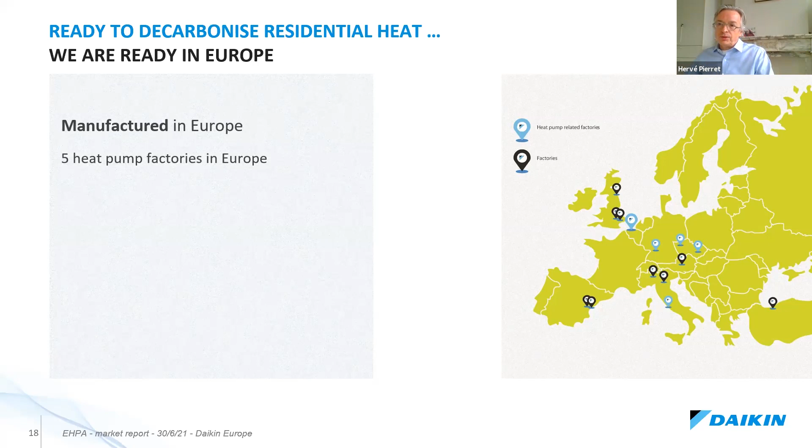What we see furthermore is that the growth we expect for heat pumps isn't just us thinking it will grow, we actually feel an increasing customer interest. We see the same from the government side, with clear government support for renewables today in terms of incentives. Some of the clearest examples are in France, but definitely also the super ecobonus in Italy.

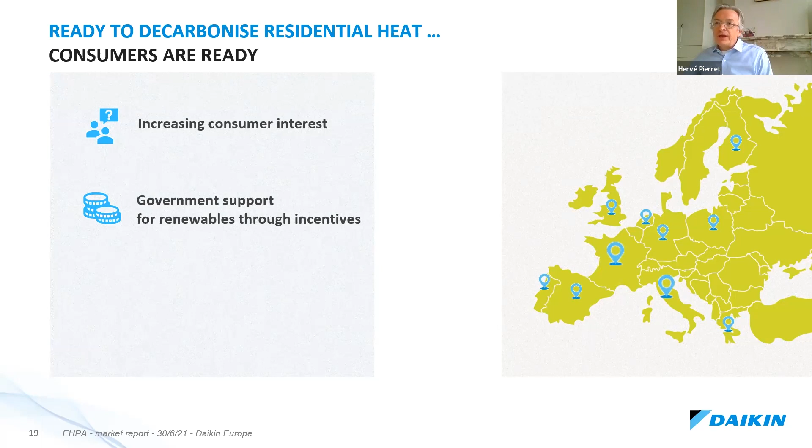Going from there, to say we are ready to decarbonize heat, we believe there are 4 key steps to take, which we've already widely communicated. First, we need to make sure our new build rules are continuously strengthened, so that the only logical solution to avoid carbonized heating in new builds is to ensure all new builds go with heat pumps. We believe 2030 is a very realistic target to reach this throughout Europe.

The second element is the replacement rate, where we request member states to really push for measures encouraging people to install a more efficient heating system in their house, ideally a heat pump. The third one, a very important one, is that we currently still see fossil fuels incentivized, either still with some subsidies in the replacement market, but also, as already touched on by Josephine, with a very different tax level for electricity versus gas.

There we really request governments to act and generate an even level playing field for both electricity and gas driven systems. The fourth key step is to push governments to move people towards renewable heating, and ideally make renewable heating a standard in replacement, so that as a sector we're able to decarbonize heat and help Europe become a carbon-free continent by 2050. On this note, I'd like to close and open to your comments and questions.

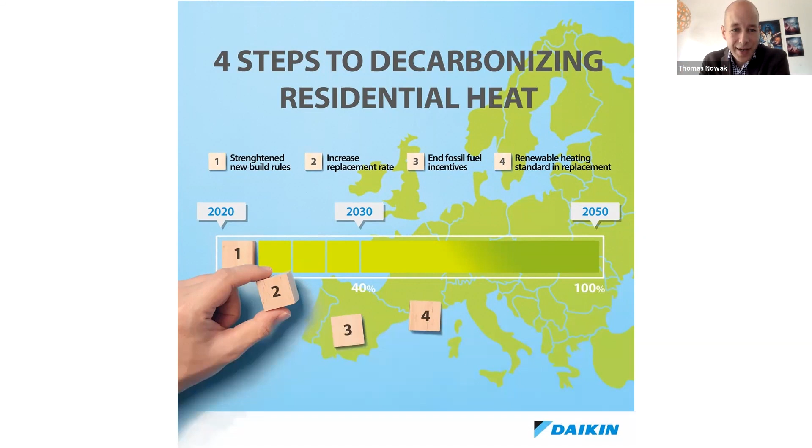So we have a number of questions. I would leave them for a final discussion because they're not for clarification. Niels, you have heard all this. May I disclose that you're looking for a heat pump yourself? So not only would I like to see your commission perspective, but I know that you are very concerned with the value chain, so I want to give you the opportunity to also express that.

Thank you, Thomas, and thank you for the invitation to be here and for the interesting presentations. I think it's good news that sales increased last year despite the crisis. Of course, you can discuss whether it's enough, and I don't think it is.

Josephine mentioned all the policy and regulatory aspects. This is something the Commission is working on, and there will be news on that front just two weeks from now in the Fit for 55 package, where I think you will recognize at least some of the boxes you highlighted here. We are trying in the various instruments to promote the green energy transition, and it's very clear that electrification of space and water heating is a sine qua non for the green transition and climate neutrality. In all the realistic scenarios we operate with, we see a very sharp growth in electrification, and space and water heating is really one of the applications that's not so hard to decarbonize, technologically at least.